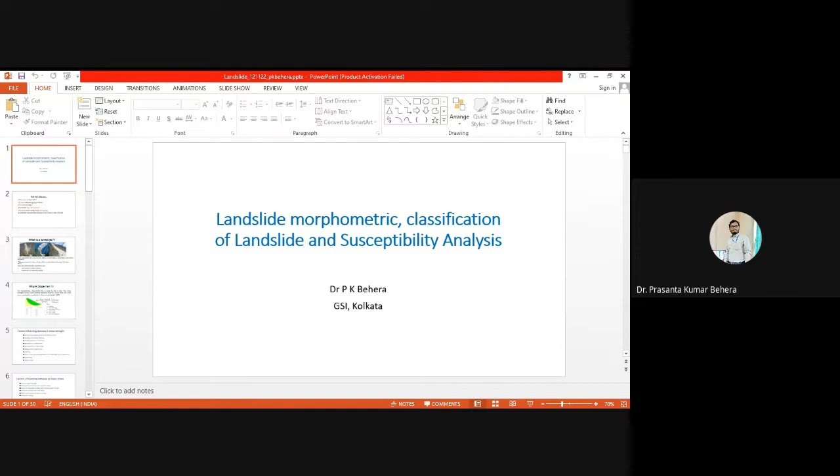Okay, thank you. Good evening to all. Myself, Dr. Prasanta Kumar Behera. I'm working as Assistant Geologist, Geological Survey of India, Kolkata. The topic of presentation today is titled landslide morphometry and classification of landslide and susceptibility.

So before I proceed to the next slide, I will give some idea about the landslide. Mostly the landslide generally occurs in the Himalayan region and some part of the southern and western region also. The basic difference is the northern landslides are more steep slopes, whereas in the southern sides, the slope angle is very less.

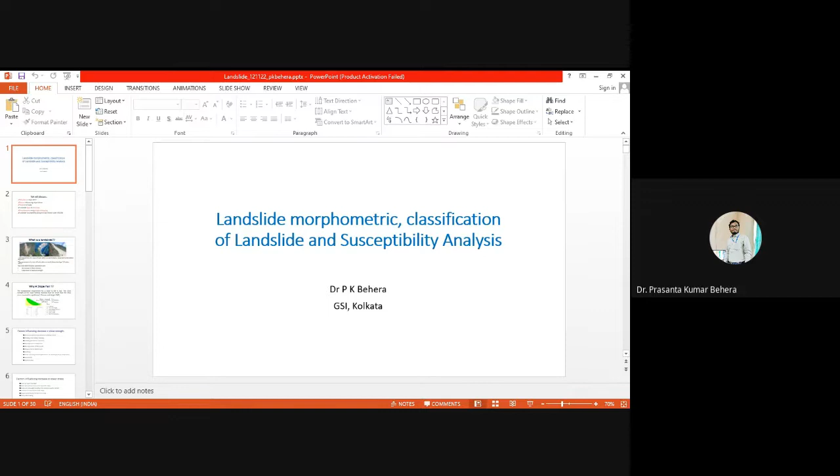First, we have to know what is landslide. It's a very common thing and it has a very known definition: the movement of rock mass, debris, earth down slope due to the action of gravity. This is the common definition. And according to Cruden, 1991, the movement of the mass of rock, debris, earth down slope. The two main parameters generally affecting landslides are the increase in shear stress and the decrease in material strength.

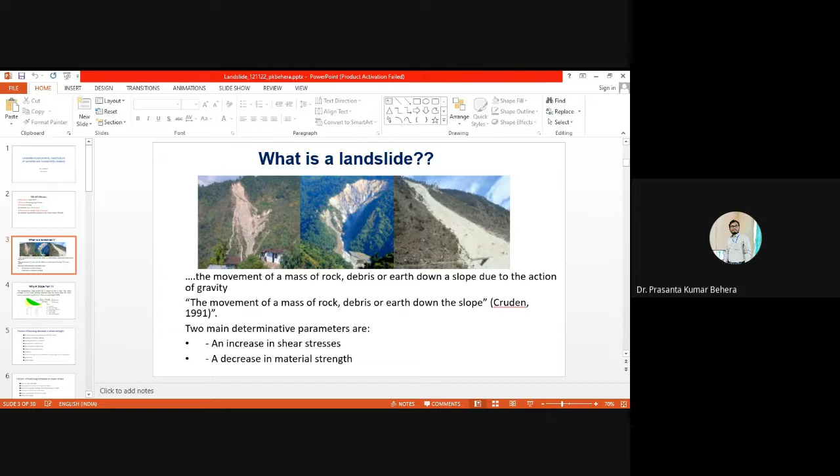Why does a slope fail? Generally, slope failure occurs when the shear strength of the slope-forming material is less than the shear stress required for equilibrium. That is called the factor of safety: resisting force upon the driving force. If the resisting force is less than the mobilizing force, then the slope will fail.

Before any type of failure of the slope, we have to calculate the stress acting on each slice, and it will give the factor of safety. Factor of safety is nothing but resisting force upon driving force. If the factor of safety is 1, that is critically stable. If greater than 1, it is stable, and if less than 1, it is unstable.

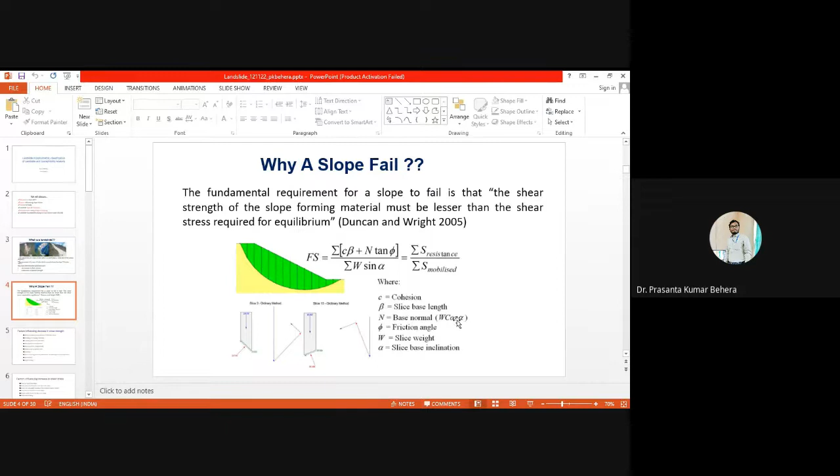And these are the parameters generally essential: cohesion, slice base length, base normal friction angle, slice weight, slice base inclination.

Factors generally influencing the decrease in shear strength: first, increase in pore pressure. Generally, when rainwater percolates into the soil mass or rock body, it develops water pressure, which reduces the shear strength of the material. Second is fracturing and shearing, cracks, development of tension cracks in the crown portion of the slope, which leads to the development of sliding and swelling.

Development of slickensides also impacts decreasing shear strength. Decomposition of filling materials and creep under sustained loads, leaching, strain softening causing brittleness, heterogeneity of composition, and weathering are also important influencing factors that affect shear strength, along with cyclic load.

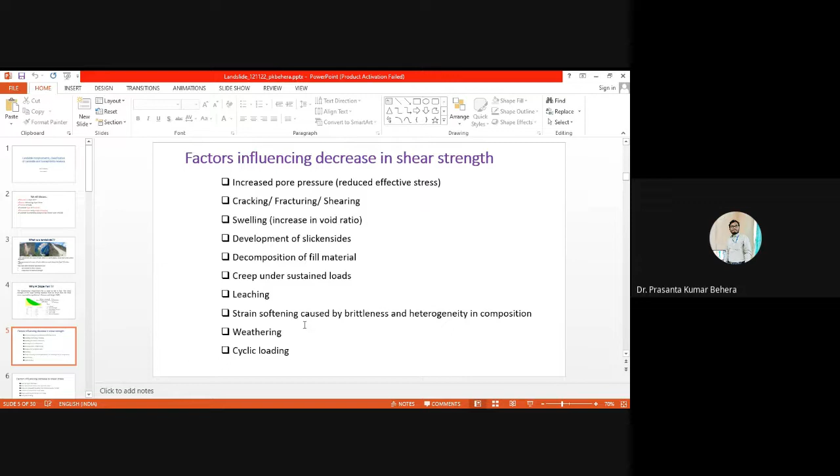Factors influence the increasing shear stress. What are the increasing factors? Loads on top of the slope, water pressure in cracks on top of the slope, increase in soil weight resulting in increased water content, excavation at the bottom of the slope, drop in water level at the base of the slope, and earthquake shaking are also important factors that influence shear stress.

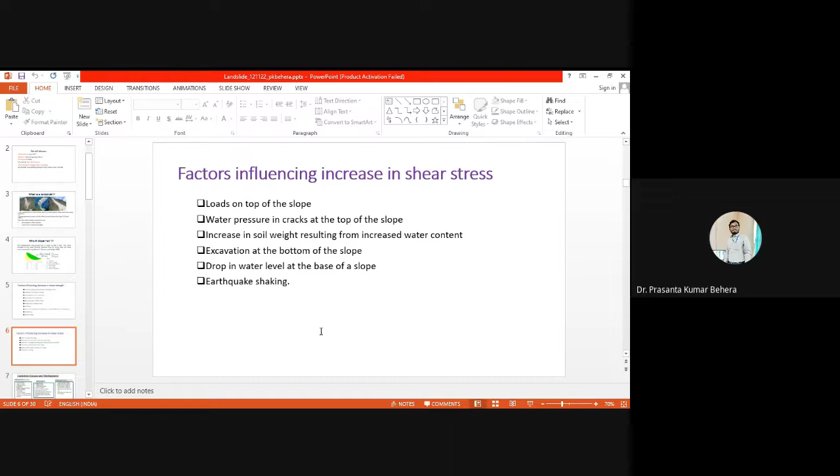Generally, what are the main causes and mechanisms? There are three: physical causes, natural causes, and morphological causes.

In physical causes, there is intense rainfall. Due to intense or prolonged rainfall, there are chances of slope failure. Rapid snow melt, rapid drawdown of floods, earthquakes, volcanic eruption, freezing, thawing, weathering, shrinkage, and swelling are also important physical causes for landslides.

Natural causes include geological causes: weak materials, weathered materials, sheared material, jointed or fissured materials, adversely oriented discontinuities, bedding, schistosity, adversely oriented structural discontinuities, faults, and unconformity of contact also cause landslides.

Morphological causes include tectonic and volcanic uplift, glacial melt outburst, fluvial erosion of the slope toe, wave erosion of the slope toe, glacial erosion of slope toe, depositional loading of slope or its crest, and vegetational removal by forest fire and drought.

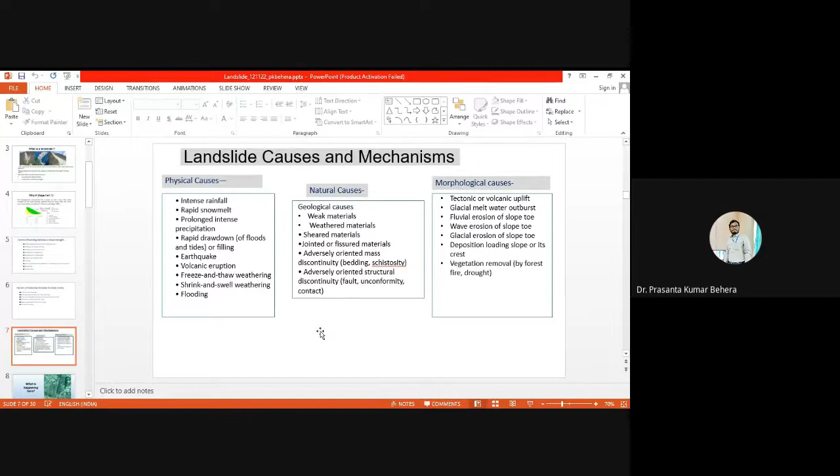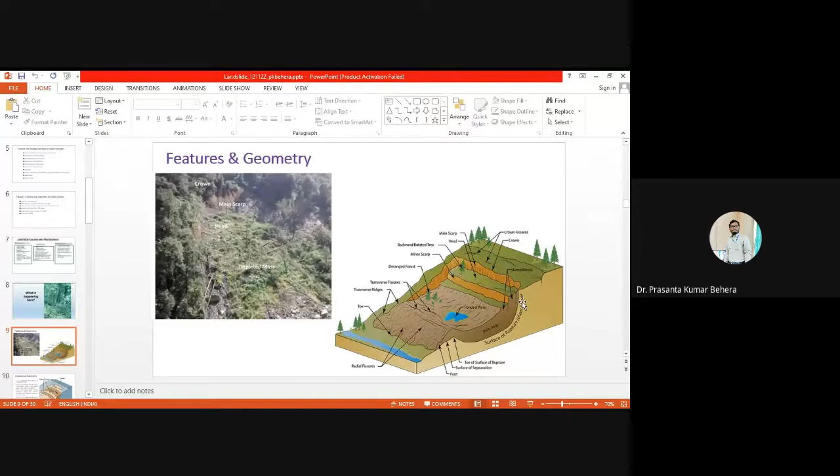Features of geometry: the crown is the place at the top of the highest part. The main scarp is the visible part of the surface of rupture, which is undisturbed ground. The head is also connected between the displaced material and the ground.

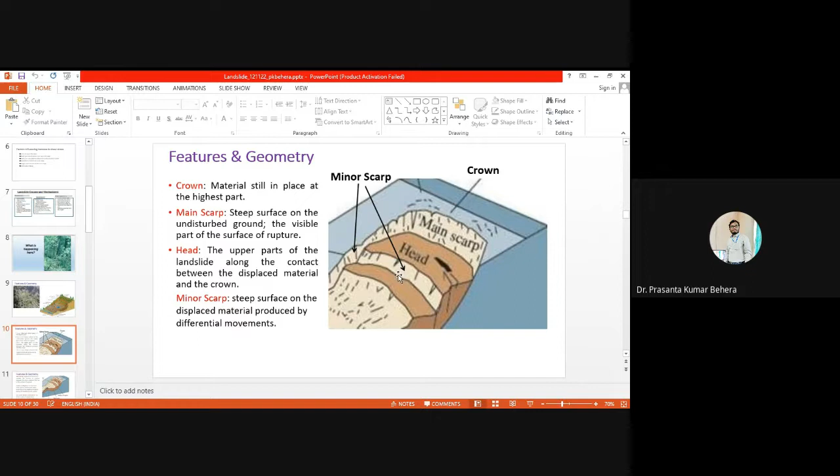This is the top portion, and minor scarps develop due to differential movements in the sliding body. The main body is the main body, and then there is the surface of rupture.

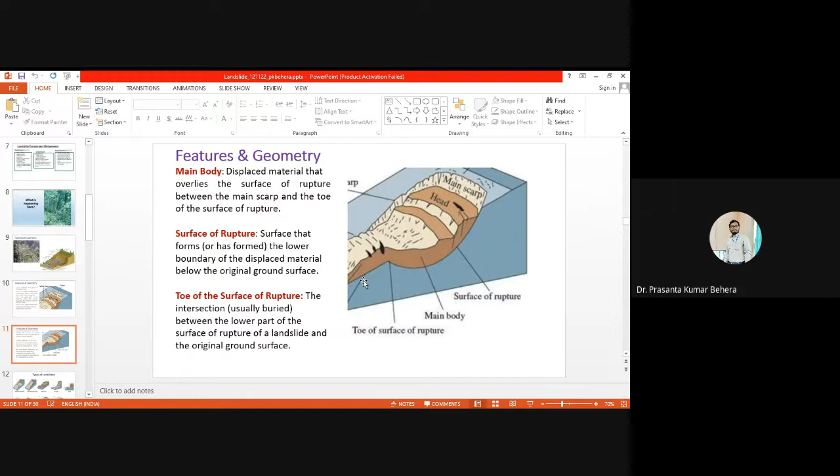If the material is loose, the surface of rupture is circular. The surface of rupture depends upon the material property, whichever type of material is there. And the toe of the surface of rupture is the portion where the landslide extends up to the toe.

There is a classification developed by Cruden and Varnes, 1996. The fall: if the bedrock is rock, the type of movement is fall. Similarly, for loose grain soil debris material, the type of movement is fall also, or fine grained soil, earth fall. Similarly, topple, slide, lateral spread, flow, and complex and compound nature of movement varies from different parts of the slope.

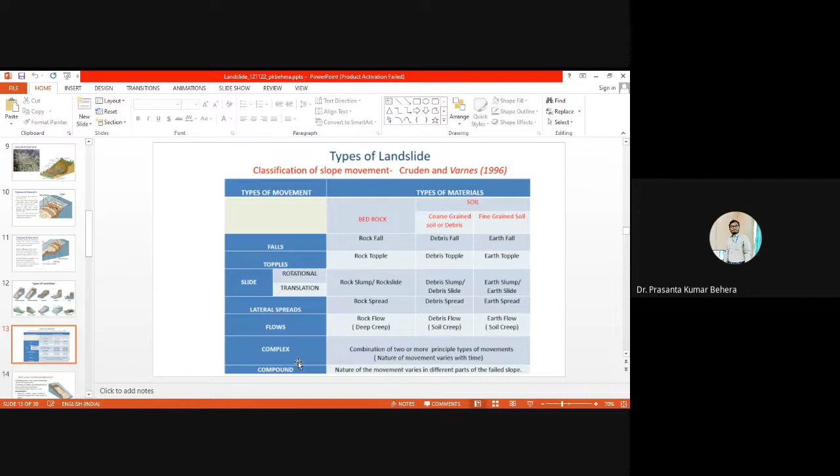But for rotational failures, generally it is loose sand material, weak soil with tensile strength and presence of cohesion, relatively uniform soil material. This rotational slide generally occurs in mines or open cast mines. These are the dumping failures. You can get rotational geometry in relatively uniform soil deposits, with low mobilized friction and gentle slope geometry.

Then you can get the rotational geometry, and then the curvilinear - the surface of failure is curvilinear in shape, particularly at headscarp, concave rupture, and rotation of the body settlement.

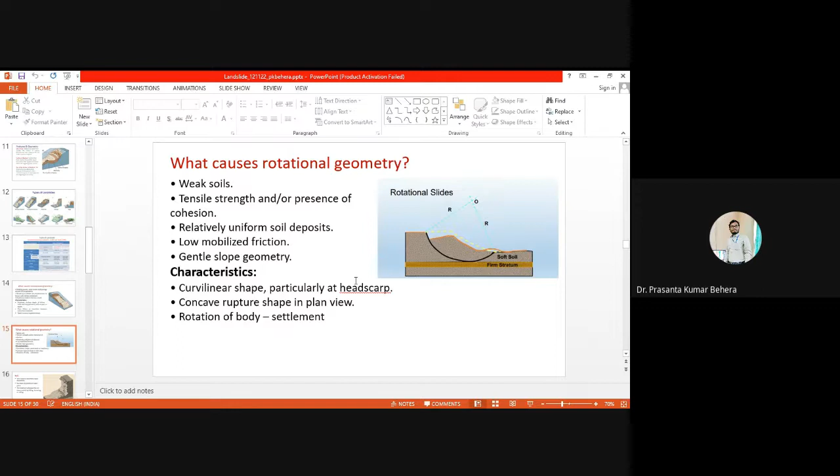And there is rock fall, with very rapid to extremely rapid movements. No shear displacement takes place. The material subsequently runs down mainly by falling, bouncing, and rolling.

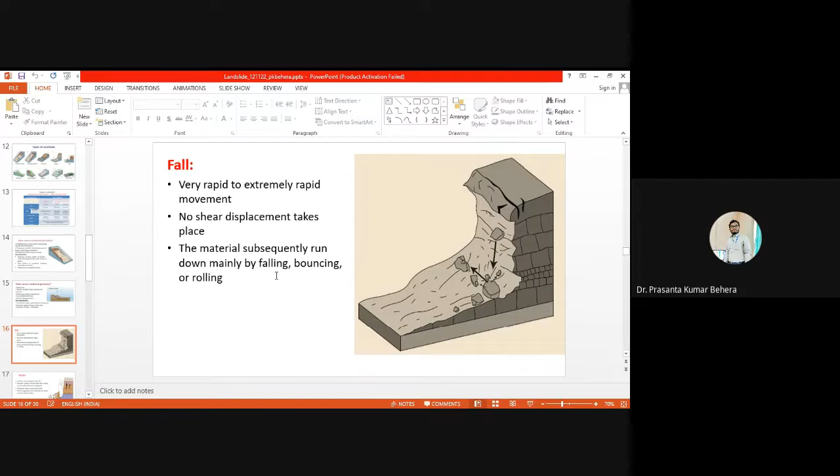Topple also is the same thing, involving overturning of the material forward, a rotation of the slope mass about an axis below the center of gravity, extremely slow to extremely rapid, driven by gravity and sometimes water or ice.

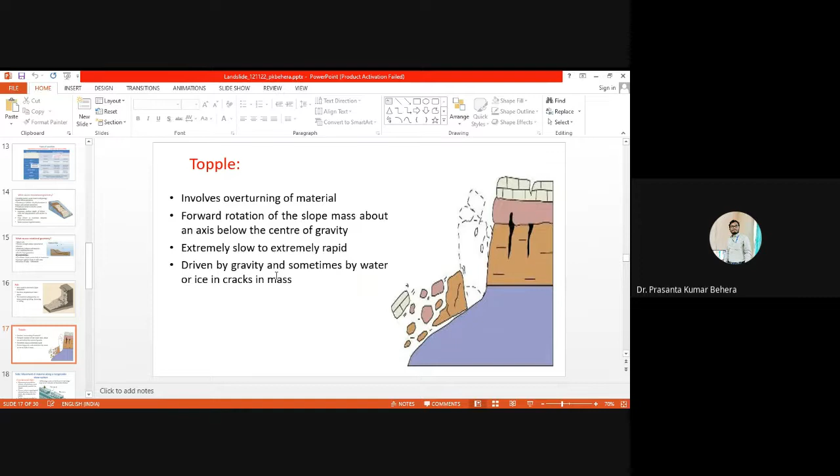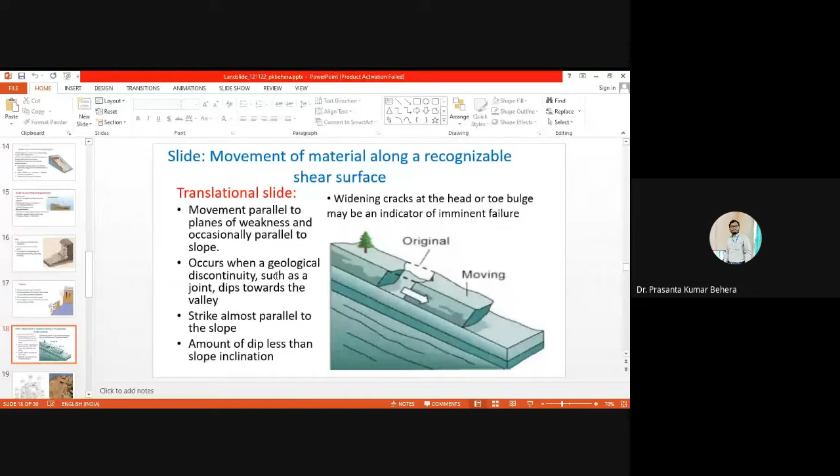Slide is the movement of material along a recognizable shear surface. Translational slides develop movement parallel to the planes of weakness, occasionally parallel to the slope, occurring when geological discontinuities such as joints dip towards the valley strike, with dip less than the slope inclination, and widening cracks are among the many indicators of instability.

There are three scales: mesoscale, microscale, and site-specific study. Generally, in landslide surveys, we do mesoscale landslide susceptibility analysis. The main thing is it requires large scale landslide investigation. Without understanding this large scale investigation, we cannot predict, and we cannot properly go to the field.

From here we can see the landslide investigation is important for landslide hazard management - for roadside, railway corridor, hill settlements, and other infrastructure projects, to address specific issues, identify unstable zones for detailed study, and for stability of reservoirs, which also requires susceptibility analysis.

It facilitates selecting sites that are less prone to ground instability, enables delineating unstable and landslide prone areas, and helps in assessing the requirement of suitable environmental programs by adopting effective mitigation and vigilance measures.

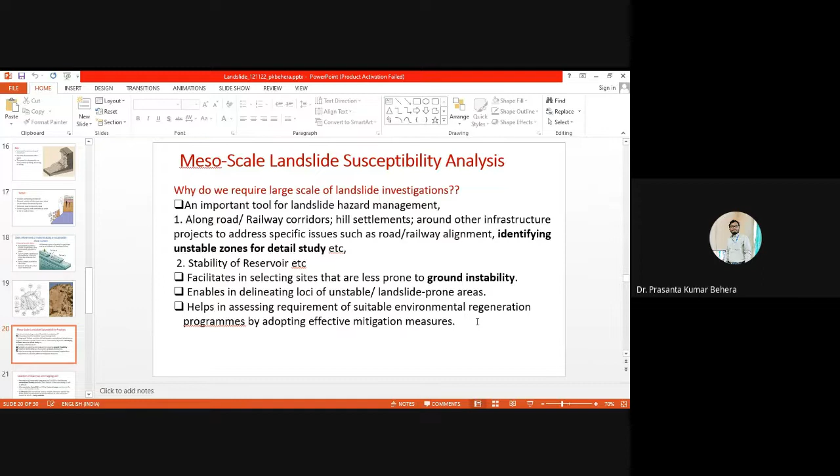10-meter resolution CartoDEM and 2.5 Cartosat image can also be used for mesoscale landslide studies. 1.5 meter DEM can also be used as another alternative option that shows similar representation of terrain features; the 10-meter resolution CartoDEM is freely available. This is the flow diagram.

Then we proceed for the geotechnical studies that include the shear strength and rock material properties, whether there is cohesion and angle of internal friction of the rock. Then we finalize the domain map - you have to prepare domain map and thematic maps, preparation of data, integration in GIS platform, and preparation of susceptibility maps separately for each domain.

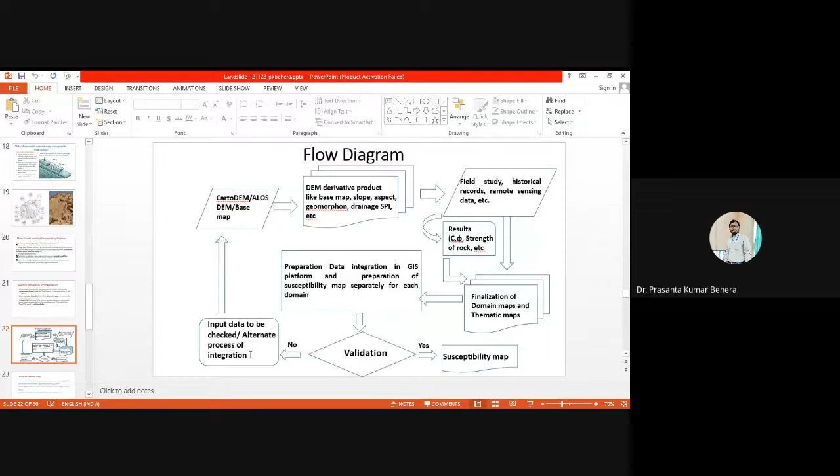And then we validate whether it is susceptibility - if yes, then okay, otherwise we will go for another alternate method.

Domain map represents the area having similar physiographic and geological characteristics that control the type of landslide occurring within it. It also helps in understanding the dominant landslide process in the respective domain, evaluation of thematic control of landslide process in each domain. What are the criteria used for mapping landslide domains?

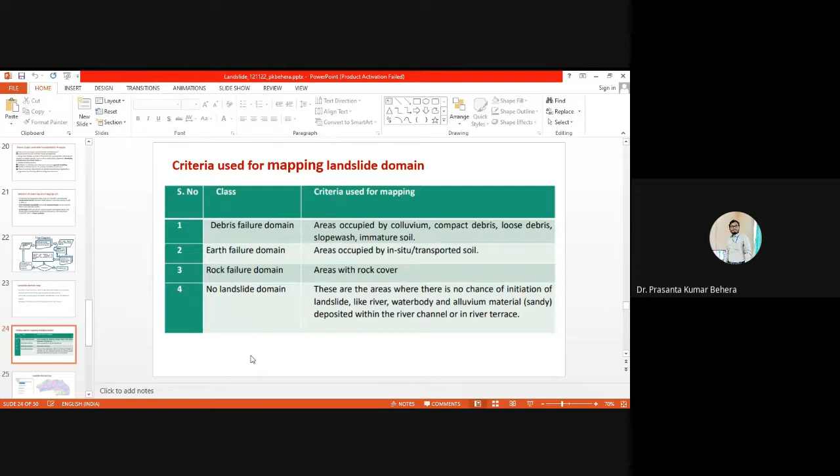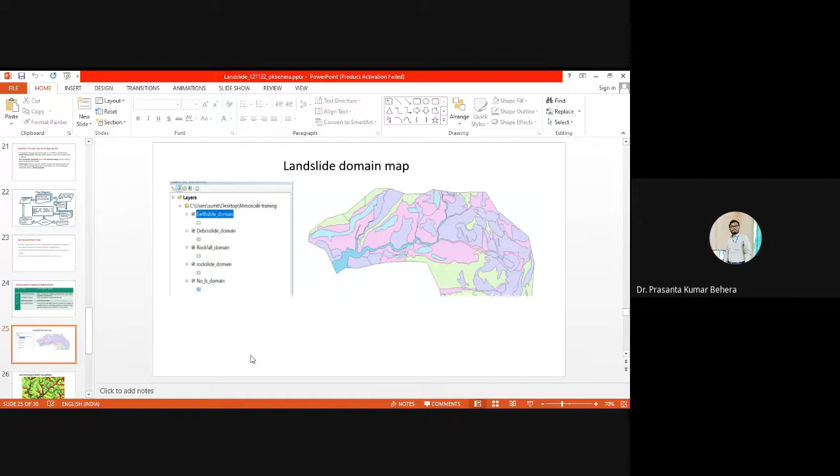Rock failure domain: area with rock cover. No landslide means the area where there is no chance of initiation of landslide, like river, water body, and alluvial material deposited within the river in the terraces. And for the landslide domain map, you have to prepare each domain set: debris slide domain, rock slide domain, and no domain. Then you combine and prepare the domain map. These are the domain maps.

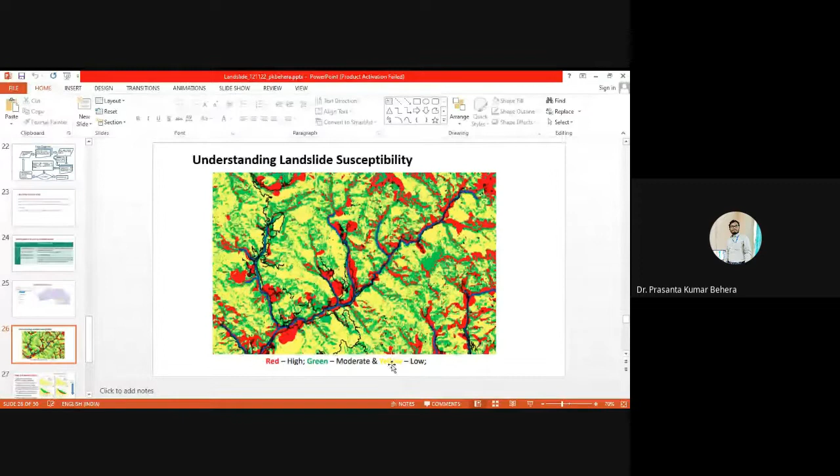And understanding the landslide susceptibility is very much important. The red color is showing high proneness to landslide, the green is moderate, and the yellow is showing the low susceptibility zone.

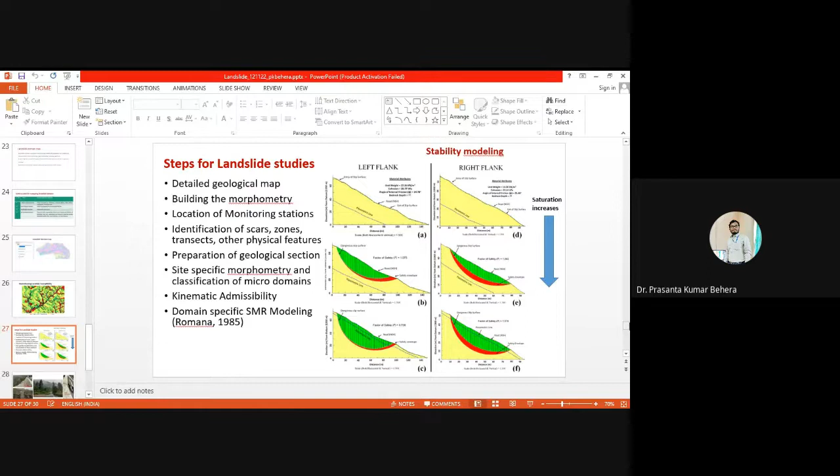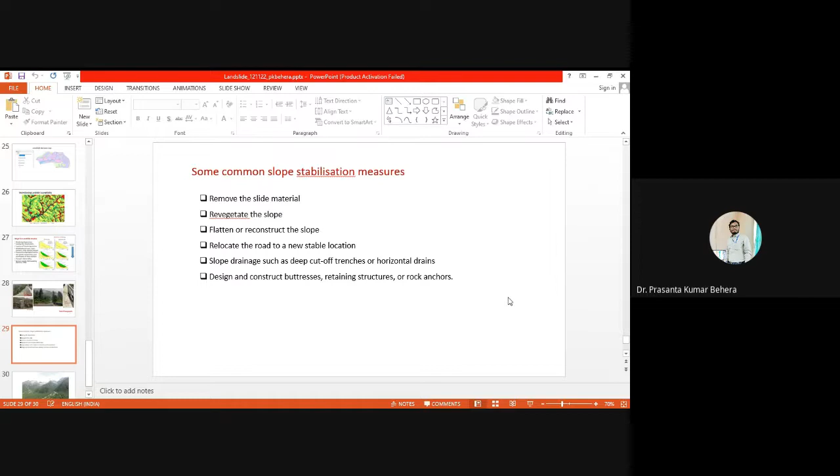So some common slope stabilization measures: removal of slide materials, revegetating the slope, flattening or reconstructing the slope, relocating the road to a new stable location. Slope drainage such as deep cut-off trenches and horizontal drains, design and construction of buttress and retaining structures, and rock anchors. There are other methods, but these are the common methods that we follow. Thank you.